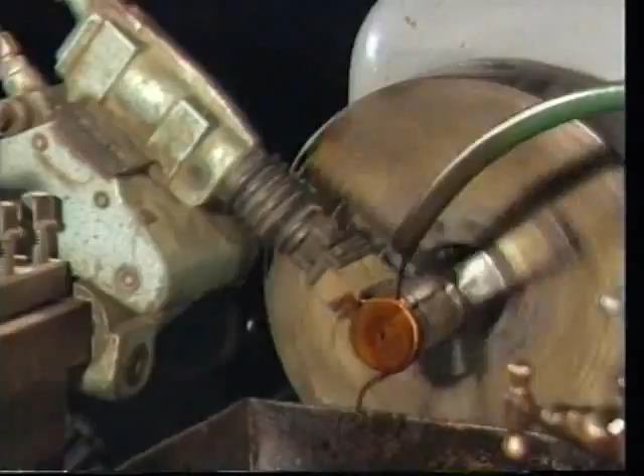Hello viewers, could you make out the process going on your TV screen just now? Well, the answer could be both yes and no. However, this program will benefit everyone. The process you are viewing is super finishing, and that is the topic of our program.

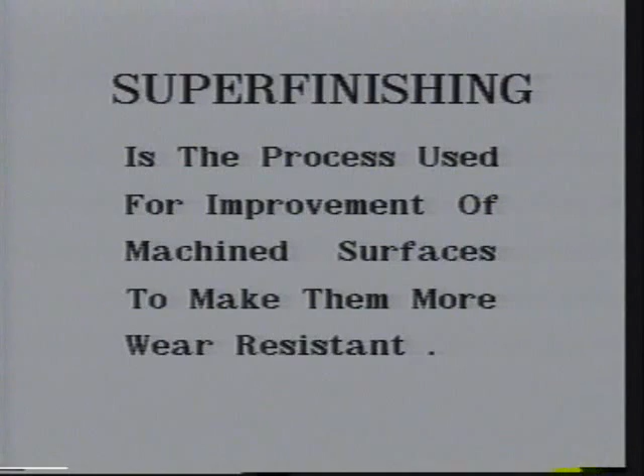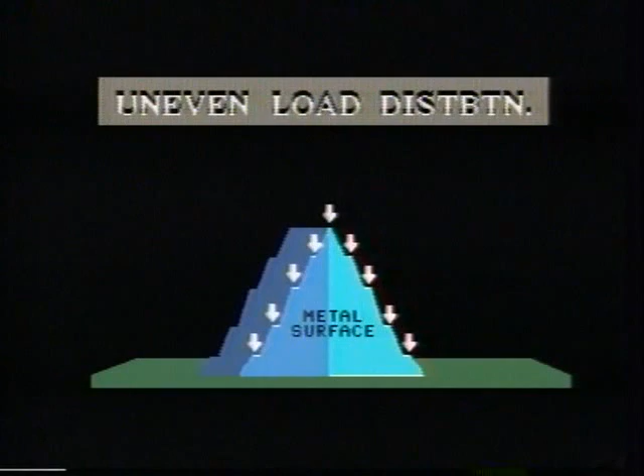What is super finishing? Super finishing is the process used for improvement of machined surfaces to make them more wear resistant. Here we have a surface with an uneven load distribution as the surface is not super finished. Super finishing removes the burnt out layers of the surface and corrects the inequalities in geometry. This gives high finish and leads to even distribution of load.

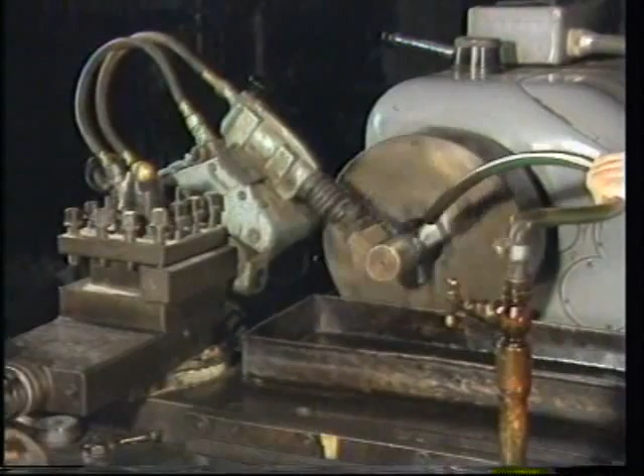How is super finishing done? Super finishing can be accomplished on a standard center lathe with the help of a super finishing attachment. Let us be familiar with its main parts and operating elements.

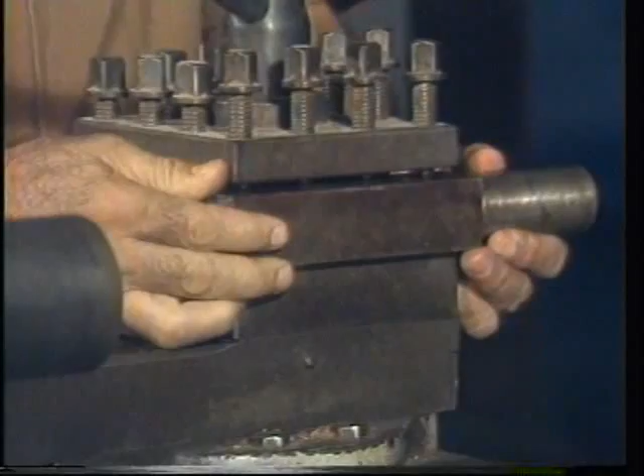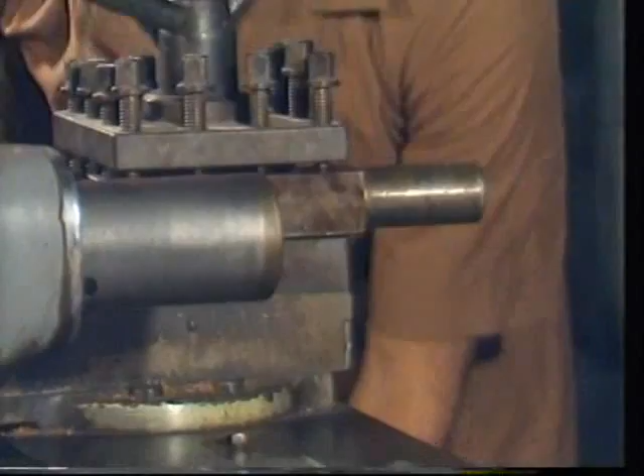Support bar. It is clamped into the tool holder of the lathe with the help of the fixing screws as seen here. The tool holder can be turned to the right position of the workpiece. Now the super finishing attachment is fixed to the round shaft.

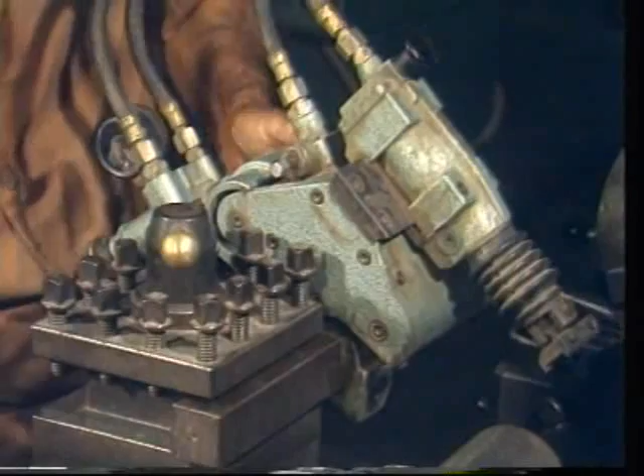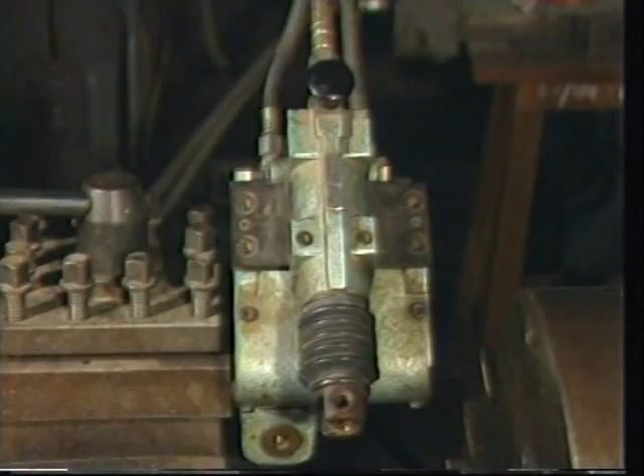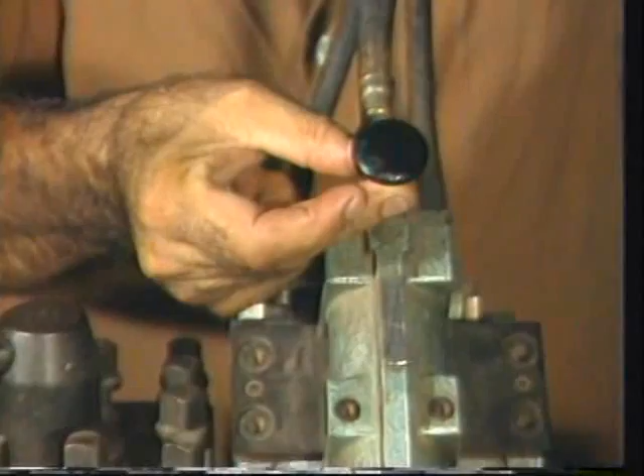Stone guide. The stone guide consists of an air cylinder with a piston to which the stone holder is fastened. It is operated by the control valve. The stone guide is connected with the attachment by means of a dovetail guide allowing longitudinal adjustment.

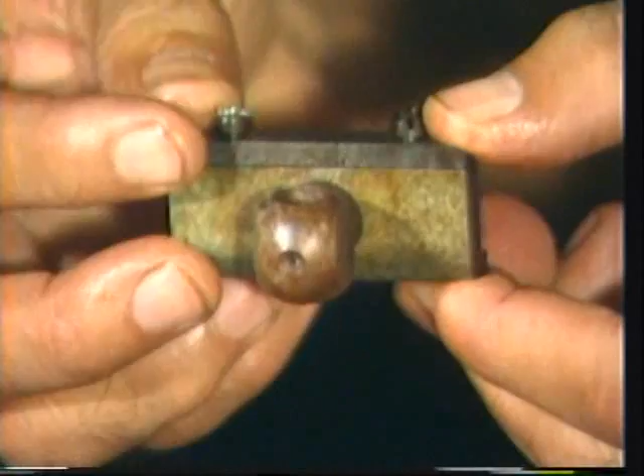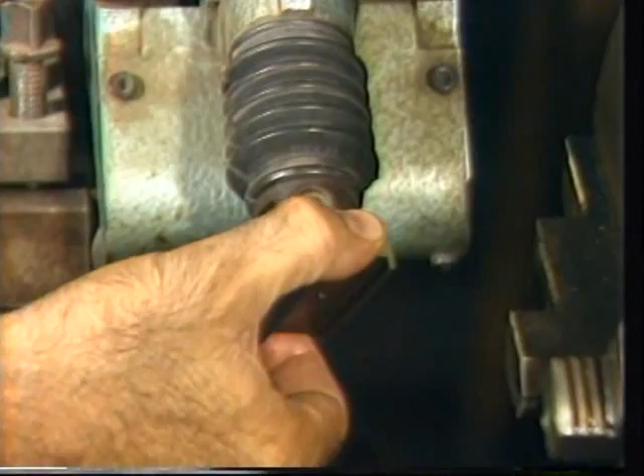Stone holder. Because of their spherical head part, the stone holders are fastened in the piston rod of the stone guide. The universal mobility allows the stone to be set precisely to the workpiece.

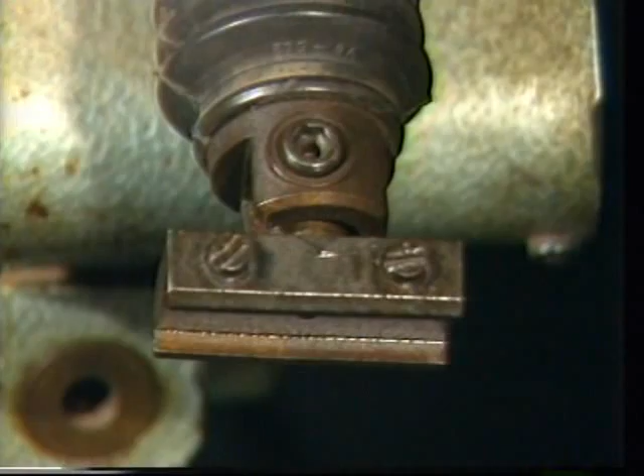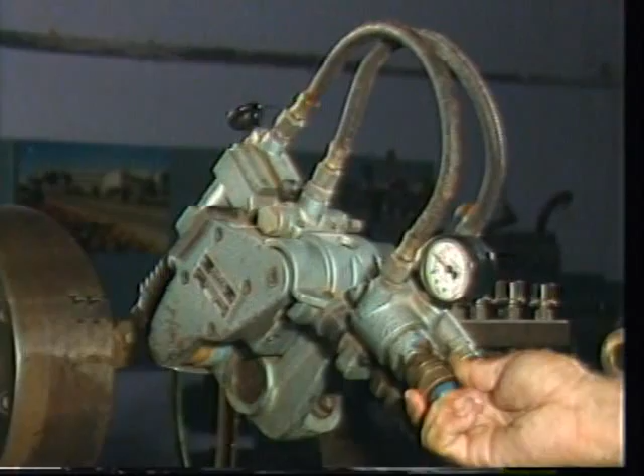Pressure reducing valve. The stone contact pressure is adjusted by this valve. It is increased by turning the valve to the right and reduced by turning it to the left. The adjusted pressure can be read on the dial.

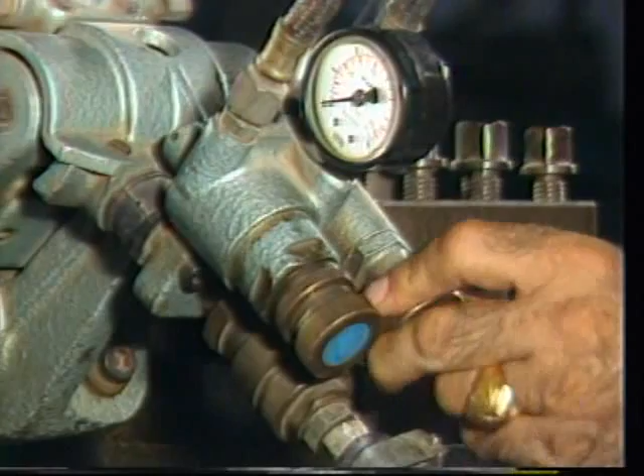Stroke regulation valve. This is the stroke regulation valve. The stroke is lengthened by turning the valve to the left and reduced by turning it to the right, up to its complete stop.

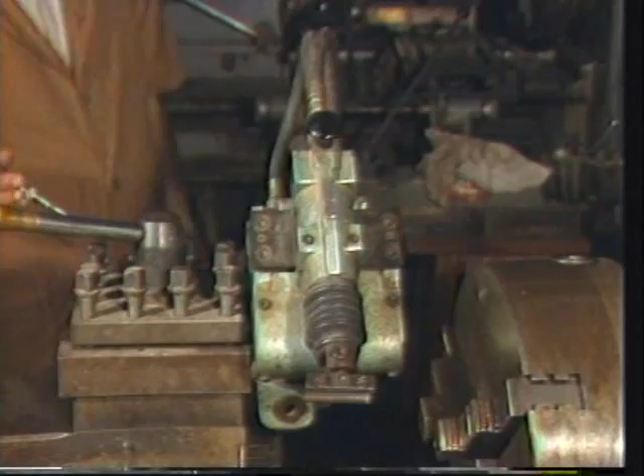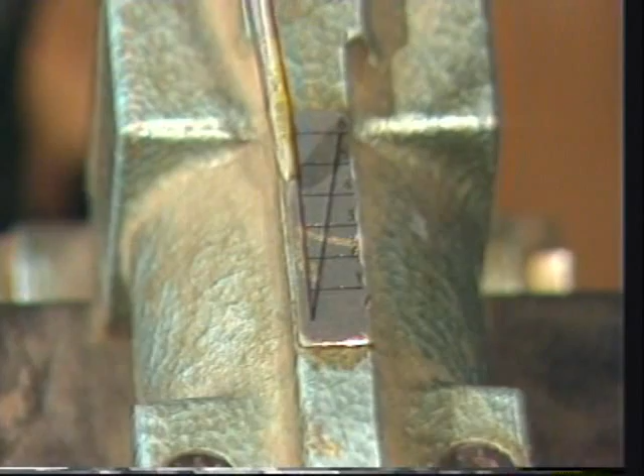Stroke value indicator. The stone guide is provided with a scale showing two crossing straight lines. The stroke value in mm can be read off from the apparent intersection of the straight line.

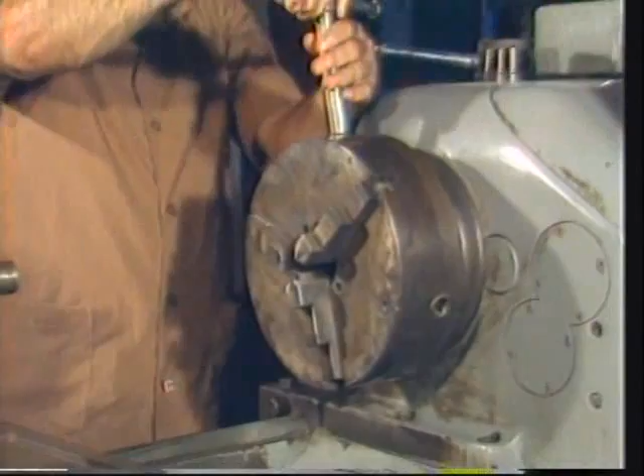Putting the attachment into service. The workpiece is clamped into the jaws of the chuck.

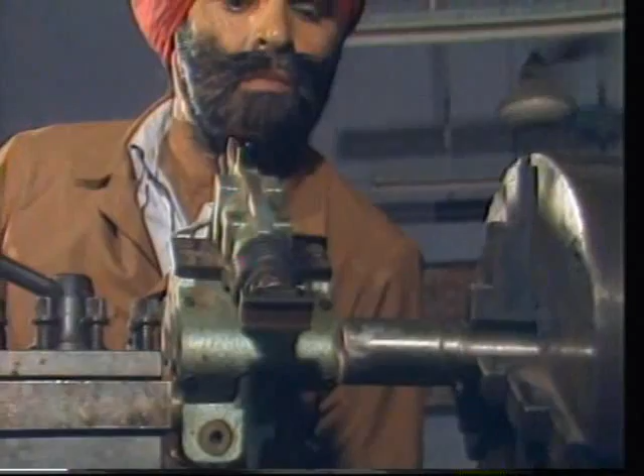The attachment is moved towards the workpiece and positioned in a way that the axis of the stone guide, by sighting, is through the middle of the workpiece.

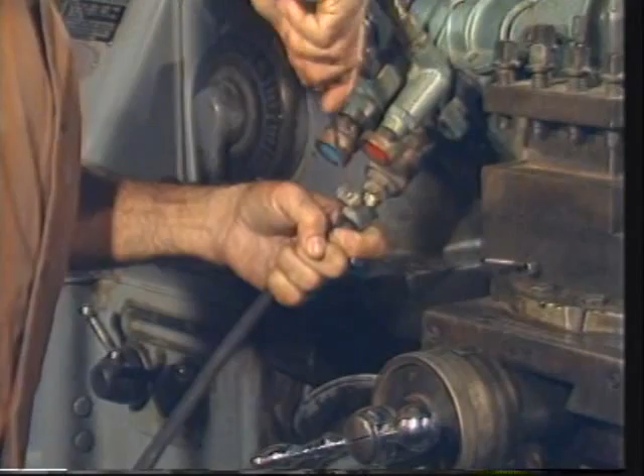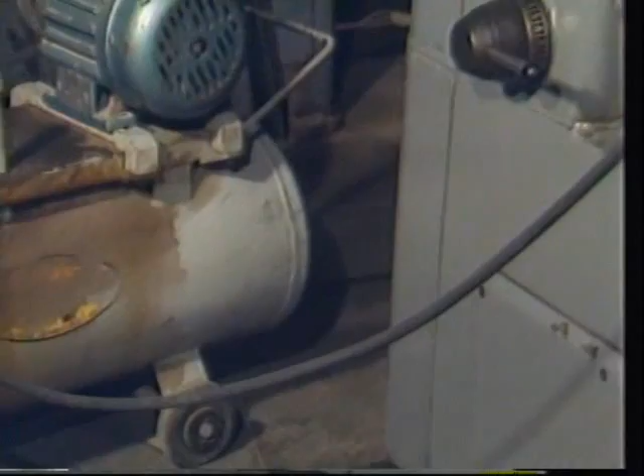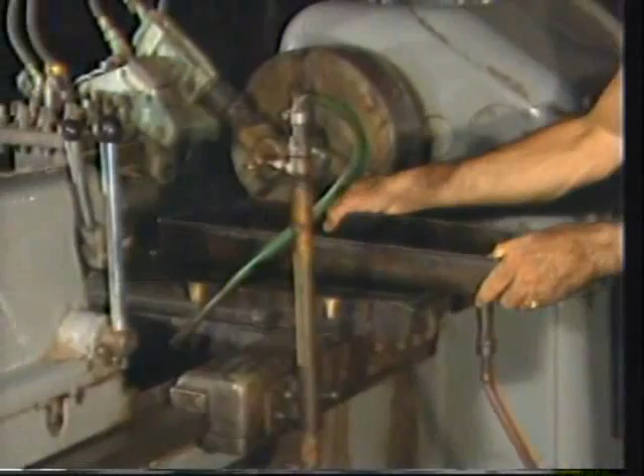Connection of air pipe. This is how the air pipe connects the attachment to the main air compressor for air delivery. For proper regulation, air pressure should be between 0.5 kilogram per centimeter square and 4 kilogram per centimeter square. Place a collecting container at the slide rest directly under the workpiece.

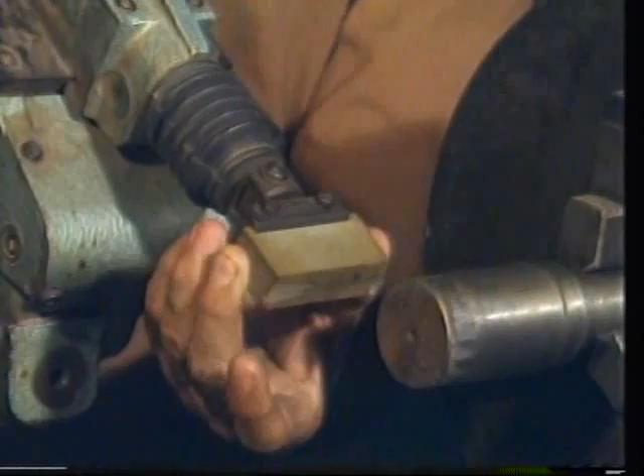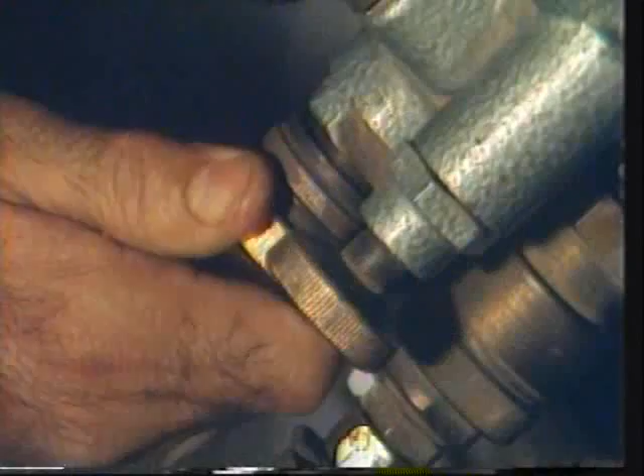Fixing of stone. Set the stone into the stone holder and fasten by means of the clamping screw. Whilst lathe and attachment are not yet running, a slight pressure has to be given so that the stone approaches the workpiece.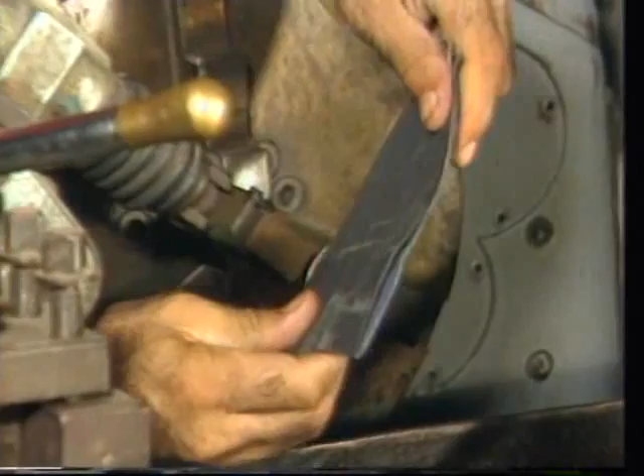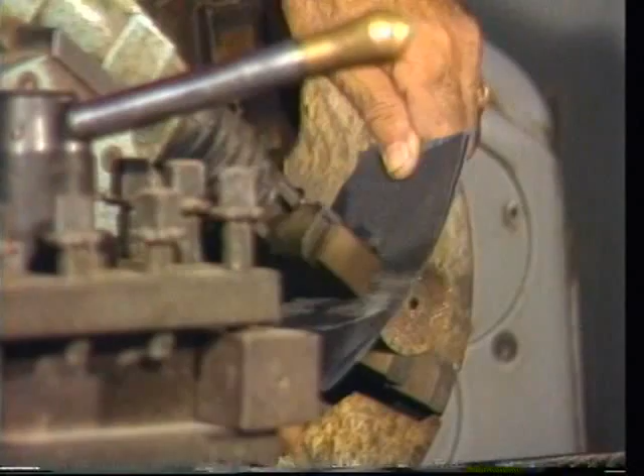Dressing of stone. Dressing of the stone is done by placing a strip of coarse-grained emery cloth under the workpiece and pushing the stone held in the stone guide. The oscillating attachment will move the stone against the abrasive cloth. The abrasive cloth has to be taken to and fro until its desired profile is formed on the stone.

Now you can start the super finishing.

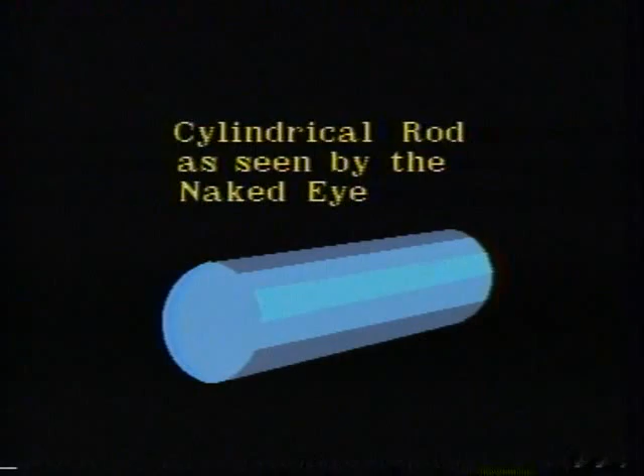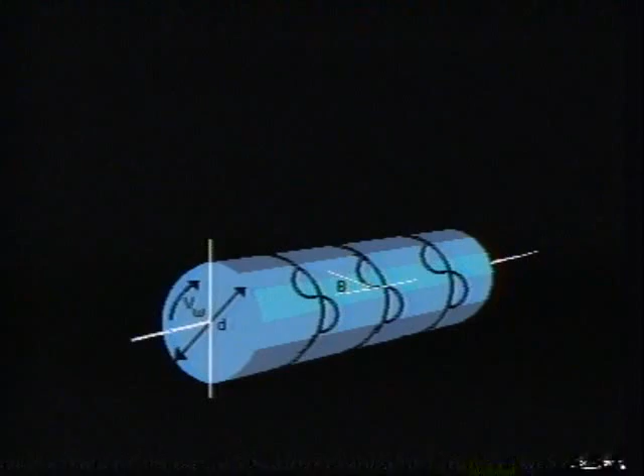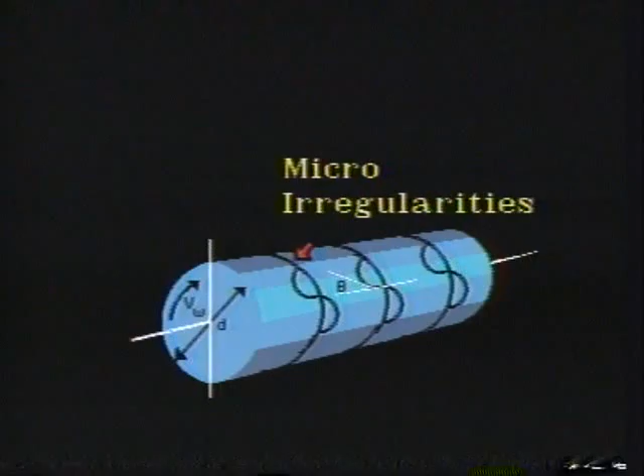Procedure for super finishing. We have got a mathematical explanation and a physical explanation for this. This is a cylindrical rod as seen by the naked eye. However, on micro-study, we see the irregularities on the metal surface. The figure shown will help us in understanding the basic governing equation for super finishing.

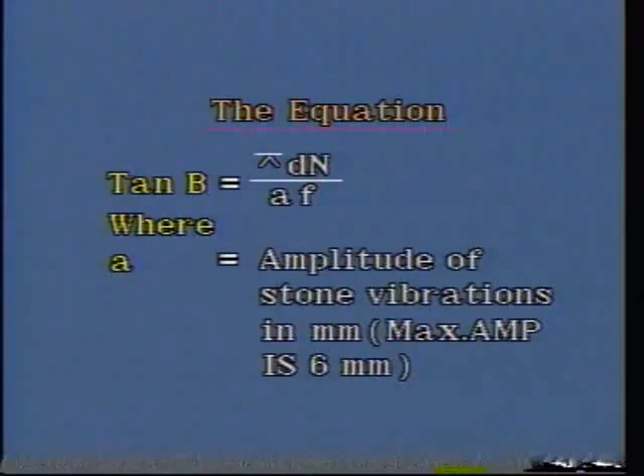The equation is tangent beta equals pi into d into n over a into f, where A is the amplitude of stone vibrations in millimeter, maximum amplitude is 6 millimeter. F is the number of strokes per minute, about 500 cycles per minute. D is the diameter of workpiece in mm. N is the RPM of workpiece.

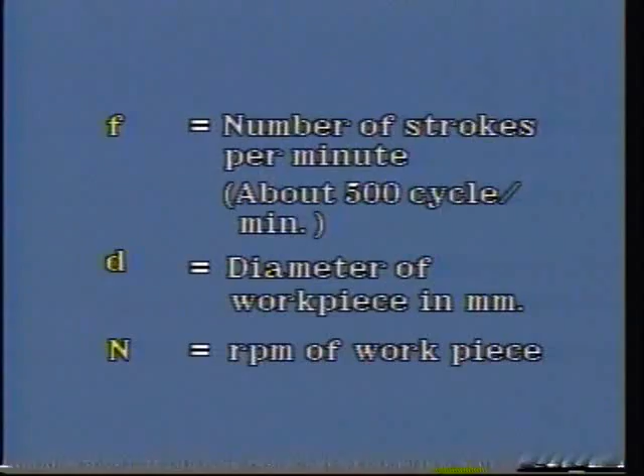V omega is the velocity of workpiece in mpm, about 20 meters per minute. P is the contact pressure between stone and workpiece, about 0.5 kilogram per centimeter square to 4 kilogram per centimeter square.

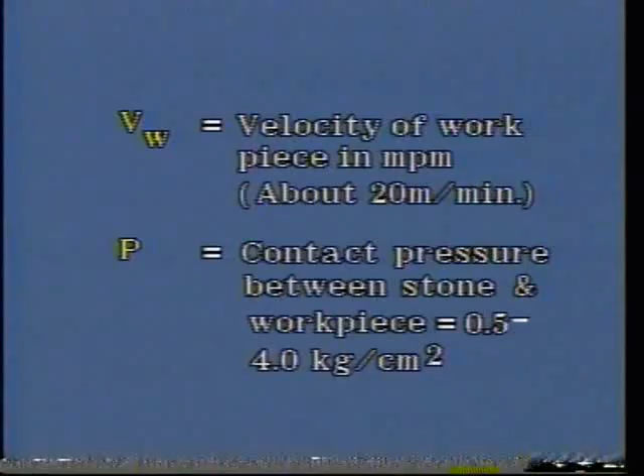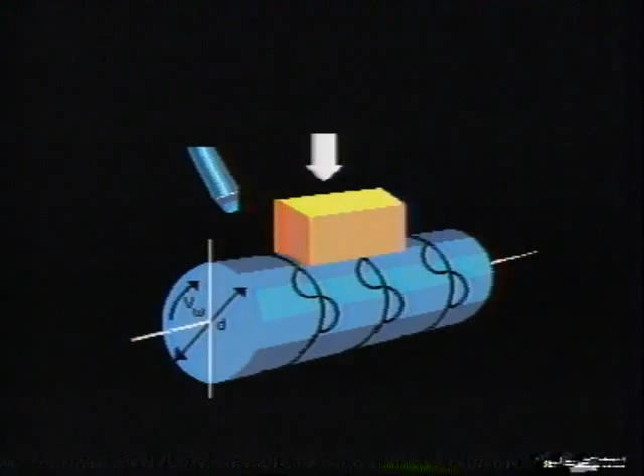It is evident that as the angle beta increases, the finishing improves, as the super finishing process makes the lines disappear.

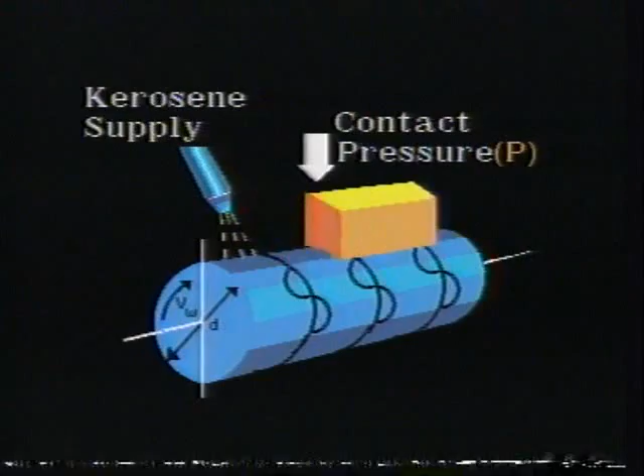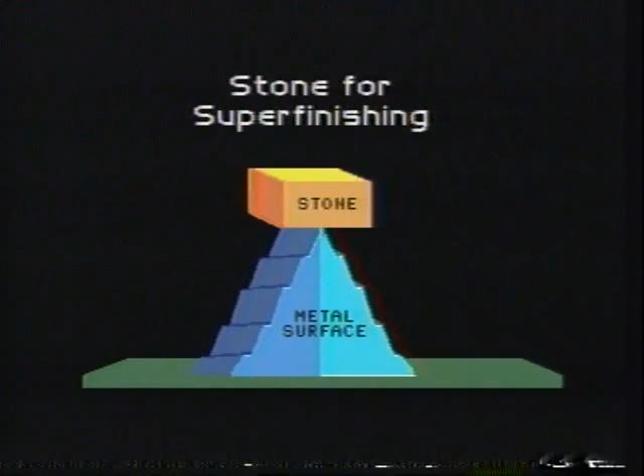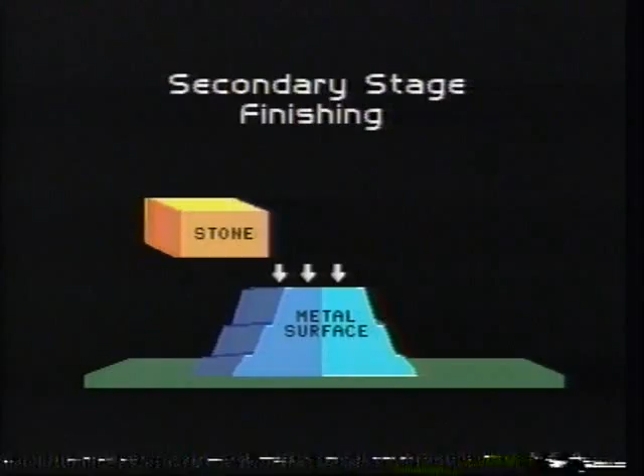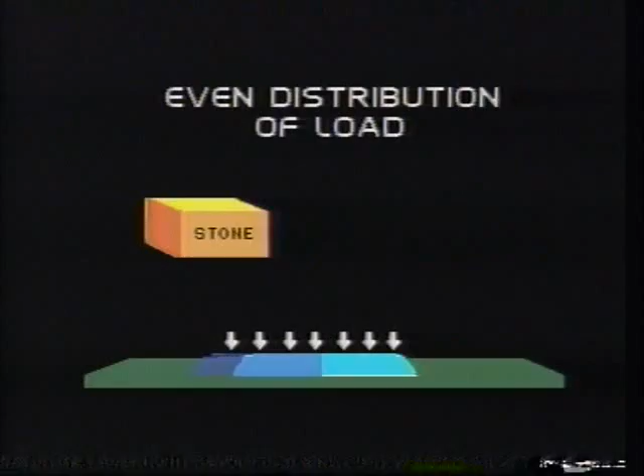The early stages of the operation consist of the abrasion of the peaks and ridges. As such, contact is only at the isolated points with increased pressure on these points. As the work approaches nearer to a true cylinder, the area of contact increases. Thus, the pressure on unit area is reduced. The load on each individual grain becomes very small and abrasion practically ceases.

For the sake of understanding and clarity, let us compare the grinding process with the super finishing process. There is high surface speed at about 2000 meters per minute in the grinding process, whilst in the super finishing process there is less surface speed at about 20 meters per minute.

Contact pressure between grinding wheel and workpiece is usually very large in the grinding process, whereas contact pressure is usually very small, about 1 kilogram per centimeter square, in the super finishing process.

Contact area is very small in the grinding process, at the maximum only line contact. Contact area is very large in the super finishing process. The entire surface of the abrasive comes in contact with the workpiece.